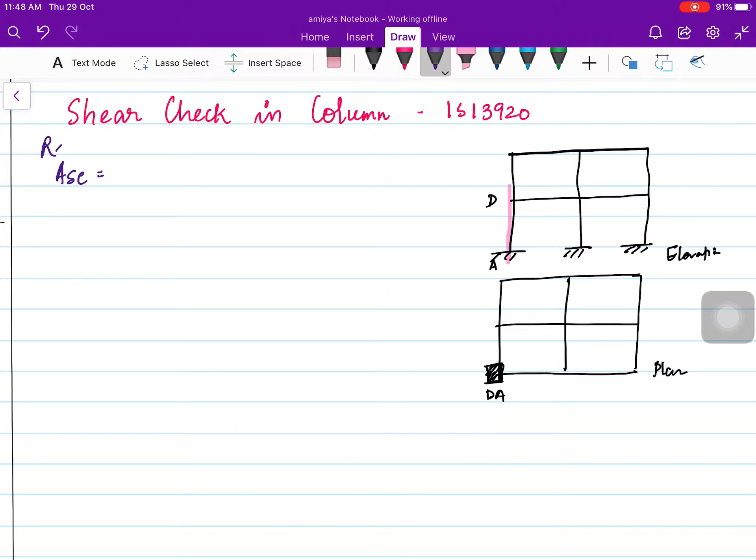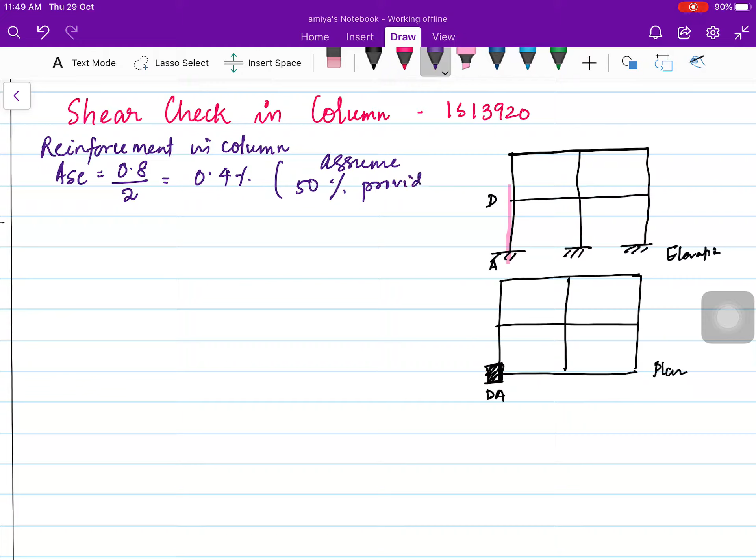In the last video, I have given the link. We have calculated the reinforcement required for the column. We have provided the minimum reinforcement and checked for biaxial bending, so 0.8% we have provided. I'm going to divide by 2, giving 0.4%. I've done this because I'm assuming 50% of the steel is provided for tension and 50% for compression. That's why I'm dividing by 2, and for this amount of reinforcement I'm going to calculate the shear capacity.

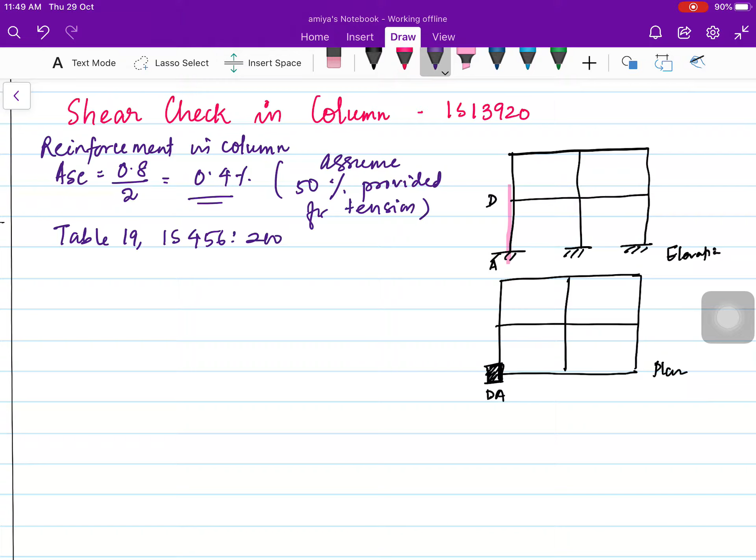If you refer Table 19 of IS 456/2000, you will get the value of tau c, that is the shear capacity. You might have also referred this many times for the beam. So referring this table for 0.4%, the value will be in the table.

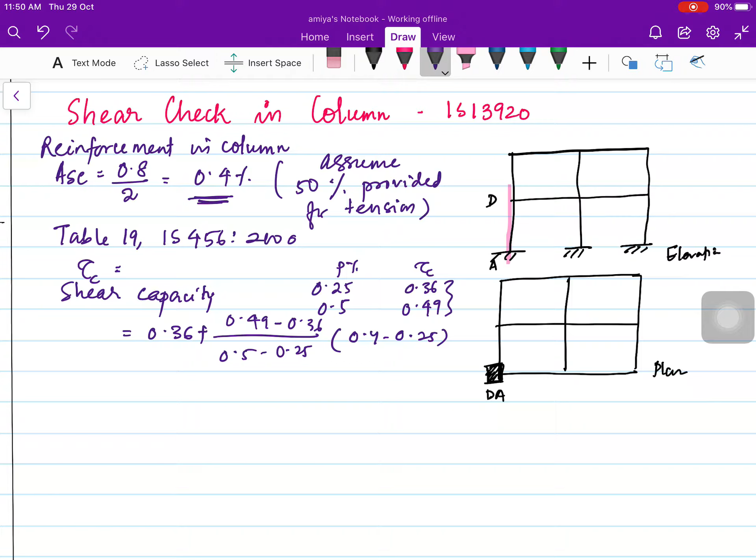If you see, there is a value for 0.25% reinforcement, which gives a tau c value of 0.36, and for 0.5% the value is 0.49. Interpolating between these two values: 0.36 plus (0.49 minus 0.36) divided by (0.5 minus 0.25), into (0.4 minus 0.25). We are calculating for 0.4%, so this value is 0.439 Newton per mm square.

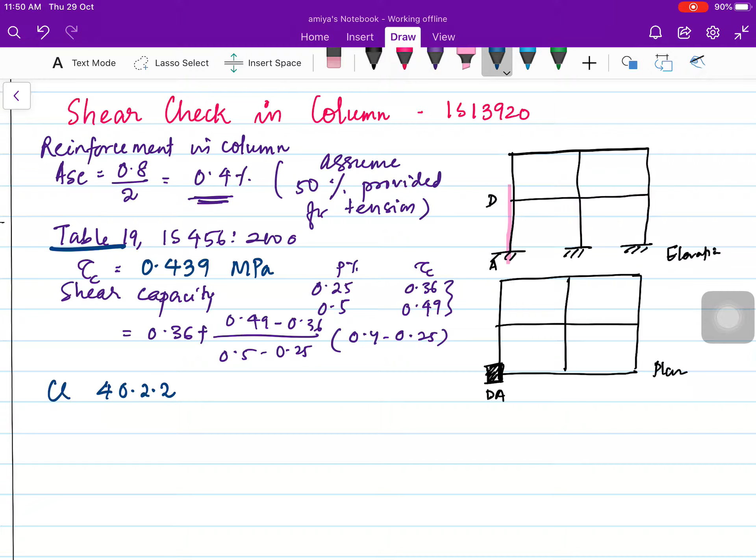Now, if you refer clause number 40.2.2, this table we usually use for beam. So in order to calculate the shear capacity for an axial member like a column, we have to multiply that with a factor delta, which is 1 plus 3 Pu by Ag by Fck.

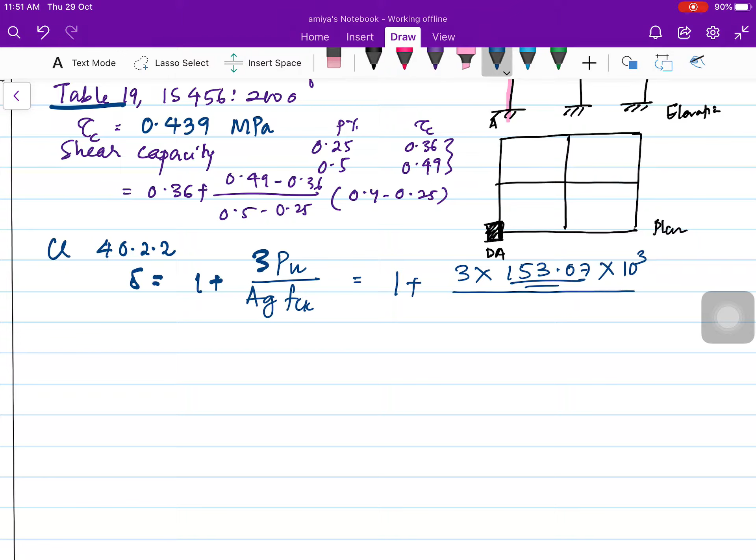So that will be 1 plus 3 into the axial force coming to the structure, which is 153.07 kilonewton into 10 to the 3. If you are referring the load calculation or the previous video where we calculated the axial force coming to this column DA in this multi-storey frame, you will know how this value came after the analysis - we have done gravity load analysis and lateral load analysis. From there we calculated this axial force coming to the column.

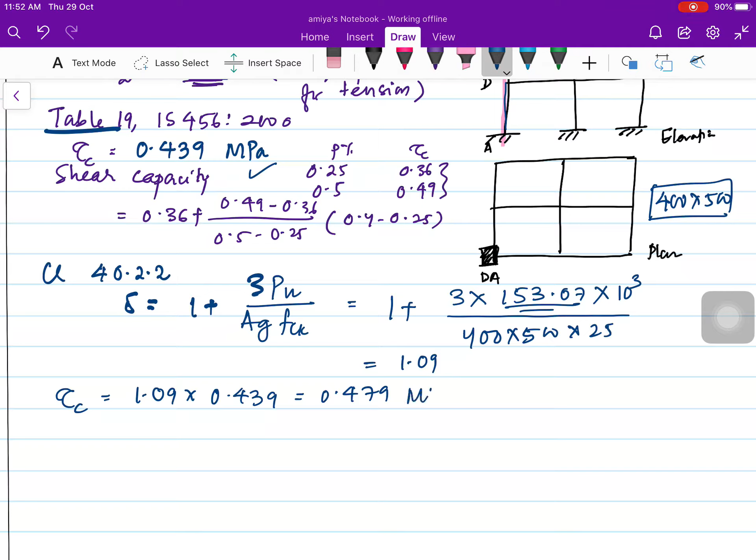So 3 into P by gross area. Column size we have taken 400 cross 500 - this is the size of the column we have assumed. So 400 into 500 into Fck is 25, giving a value of 1.09. So the shear capacity of the column is delta, that is 1.09, multiplied into the value we got from Table 19, 0.439. So the capacity is 0.479 Newton per mm square or megapascal.

Next. So this is shear stress capacity - this is stress, and we have to calculate the shear force capacity. So shear force will be...

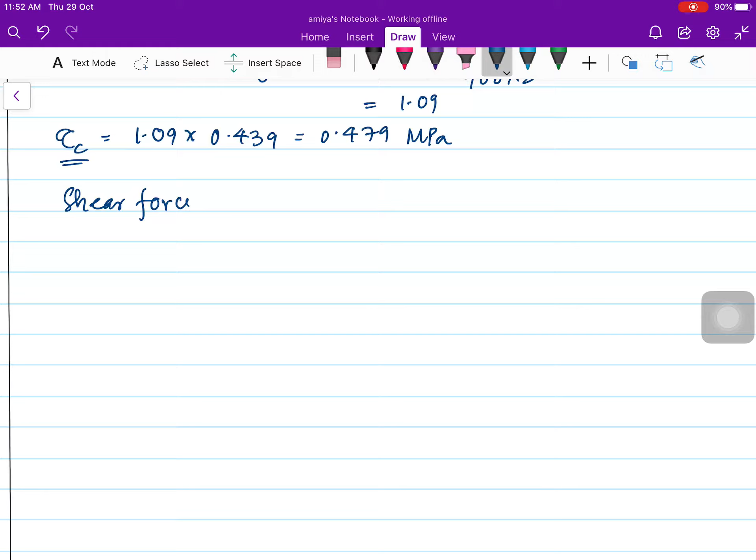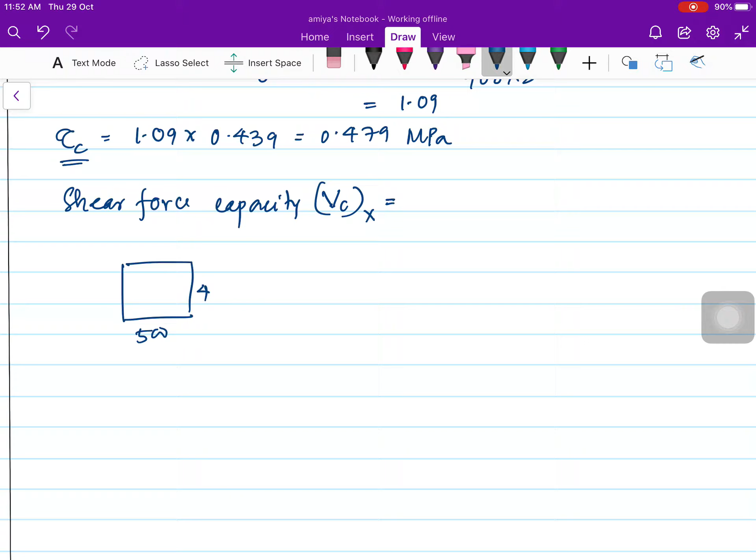That means shear stress. So if VC I'm writing in x direction and y direction, because we have two axes. If this is the column, this is 500 and this is 400 we have considered - this is the x-axis and this is our y-axis. Both axes will have different shear force capacity. So this is tau c into area we have to multiply, because this is shear stress into area. So we are going to multiply tau c into area.

Now for area, we have to calculate the effective depth. If this is the x direction, depth is 400 minus d dash. If you refer the previous video, we have already calculated d dash as clear cover 40 plus 8 for tie bar plus longitudinal bar by 2, that is 16 by 2, which is 56 mm. So 400 minus 56 is 344 mm. Similarly, the effective depth in y is 500 minus 56, which is 444 mm.

So for this, tau c is 0.479. I'll multiply with the width 500 into depth 344, so this comes to 82.4 kilonewton. If you divide by 1000, you'll get it in kilonewton. Similarly, 0.479 into 400 width and 444 depth, here the value is 85 kilonewton.

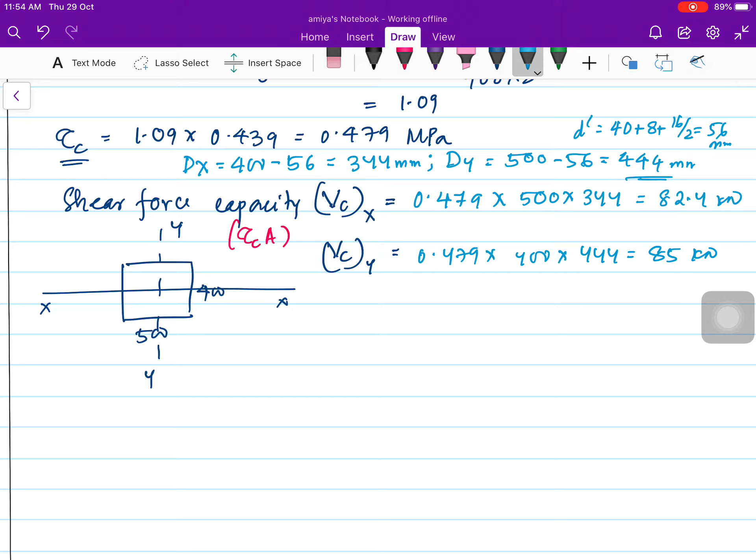So this is our shear force capacity, calculated from the shear stress capacity. This is the capacity, meaning this much force the column can take as per the reinforcement provided. Now we are going to find out what shear force is coming to the structure, and whether it exceeds the shear capacity or not. So now calculating the shear force.

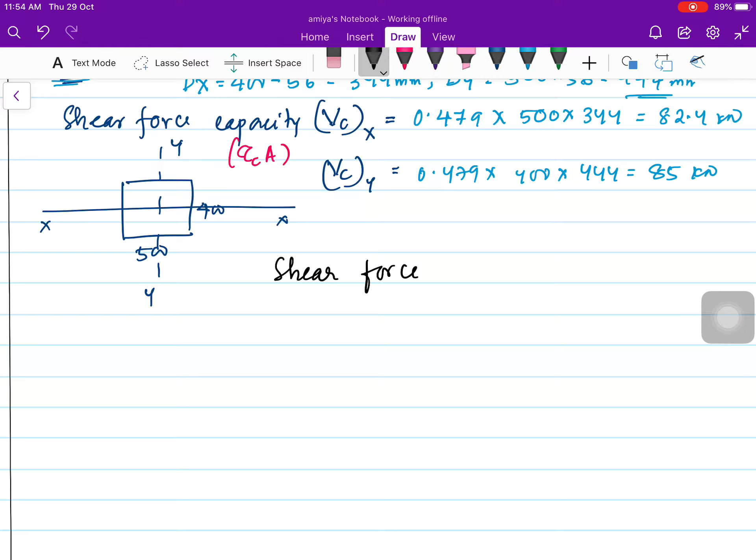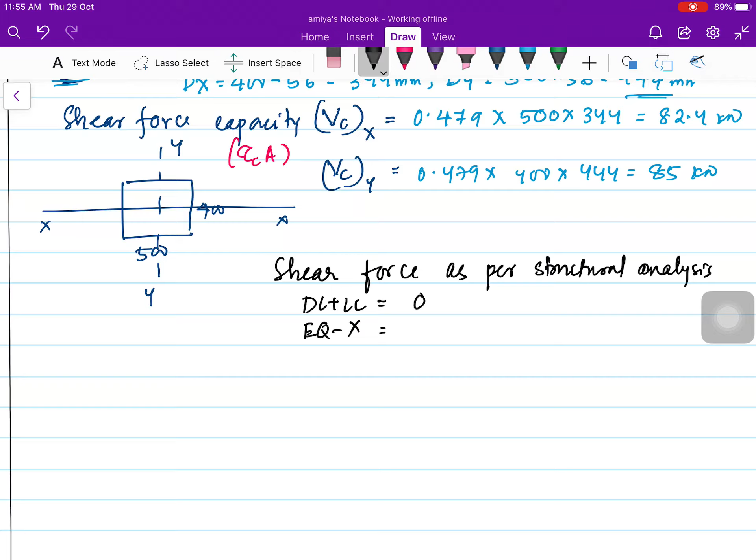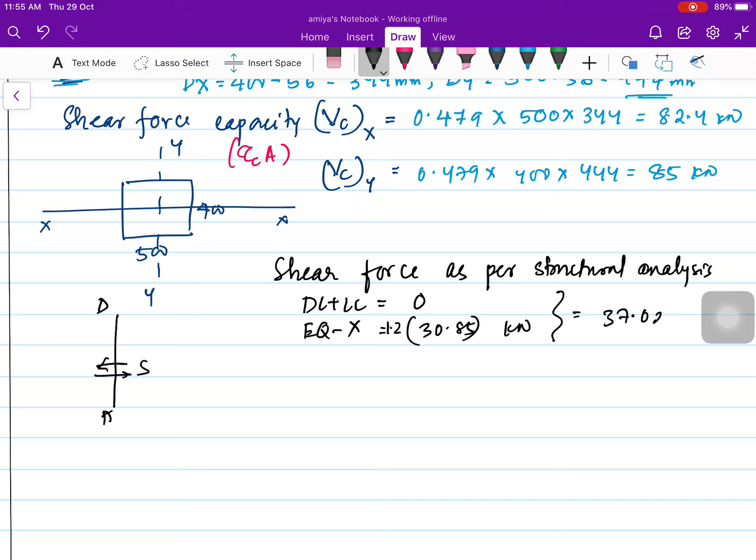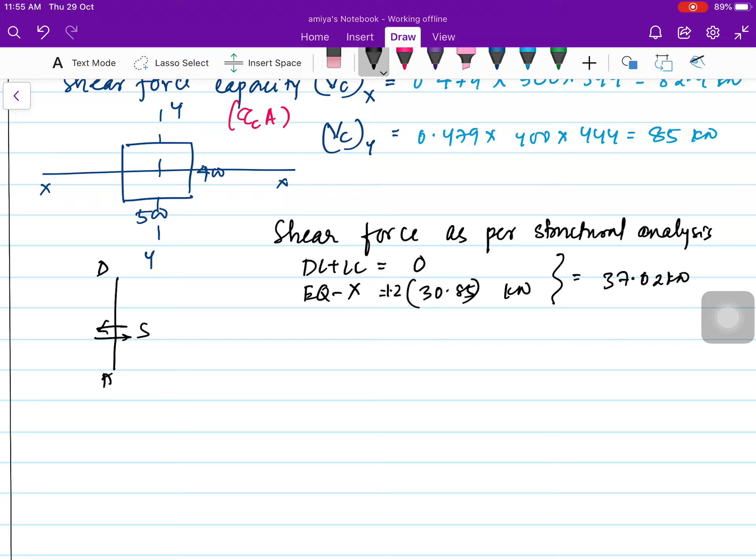So this I'm going to multiply by 1.2, because this is the factor we are taking for the analysis. Adding to this, we are getting 37.02 kilonewton, because it's 1.2 dead load plus live load plus earthquake X. For this load combination, we have analyzed our whole structure, so the same load combination I am considering.

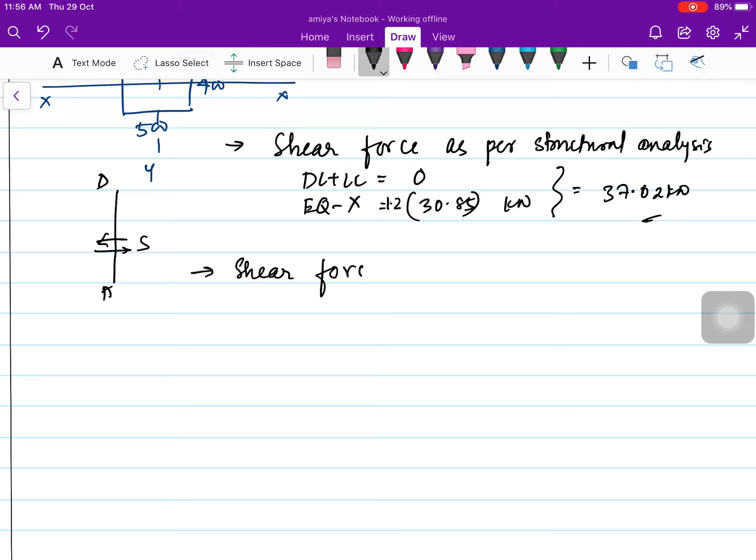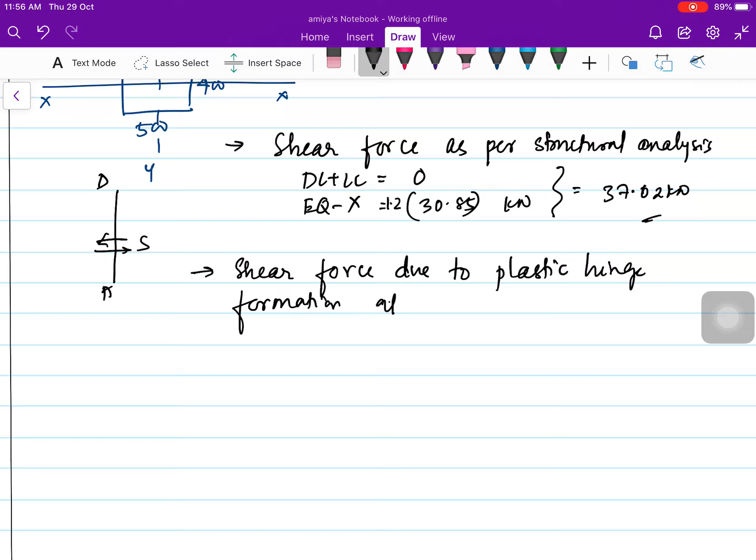But in reality, we have to consider all the load combinations. So this kilonewton value is as per the structural analysis. Then second, we have to consider also the shear force due to plastic hinge formation at beam ends. So for this, I'll just take this as Vs - what is the shear force coming to the structure?

So 1.4 into, for this we have to take the moment capacity of the beam, in sagging as well as hogging, 144.6. You can refer the video for maximum of MS and MH, that is moment due to sagging and moment due to hogging. So 144.6 by 3, where 3 is the length of the column. This comes to 67.48 kilonewton.

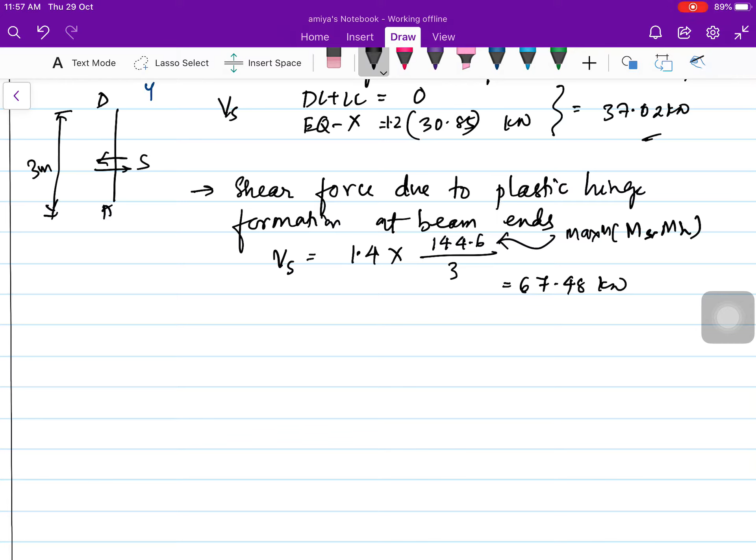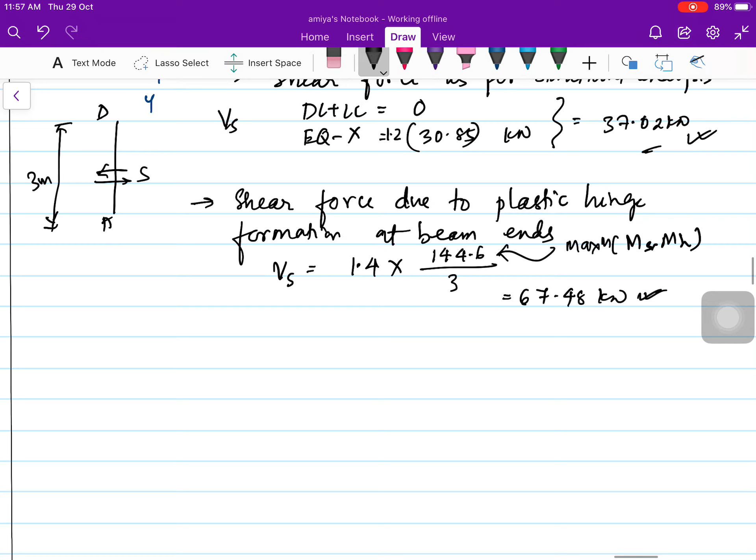So this is the shear force coming on the structure. And what is our shear capacity? It is 85 kilonewton. That means we don't need to provide more shear links, we have to just provide the minimum shear links, as it is less than shear capacity - the force coming on the structure is less than the capacity. So we have to provide minimum shear links.

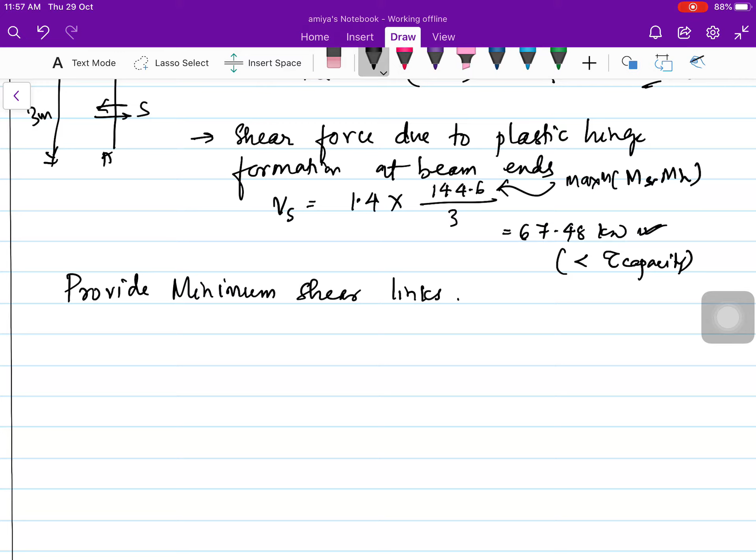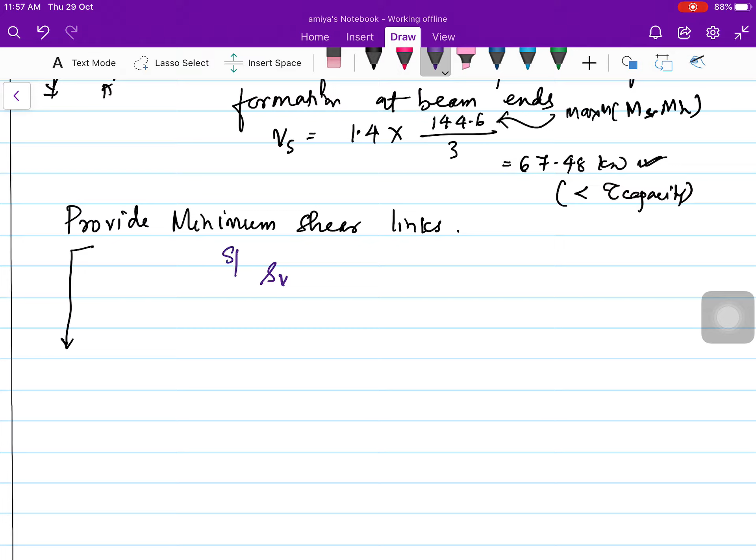Otherwise, let me just tell you, if it would have come more, then the shear spacing, the tie links that we should have provided - for example, if I'm using 2-legged 8 dia bar - into 0.87 Fy by the difference between the shear force capacity and shear force coming on the structure. So you have to calculate this and you will get the spacing.

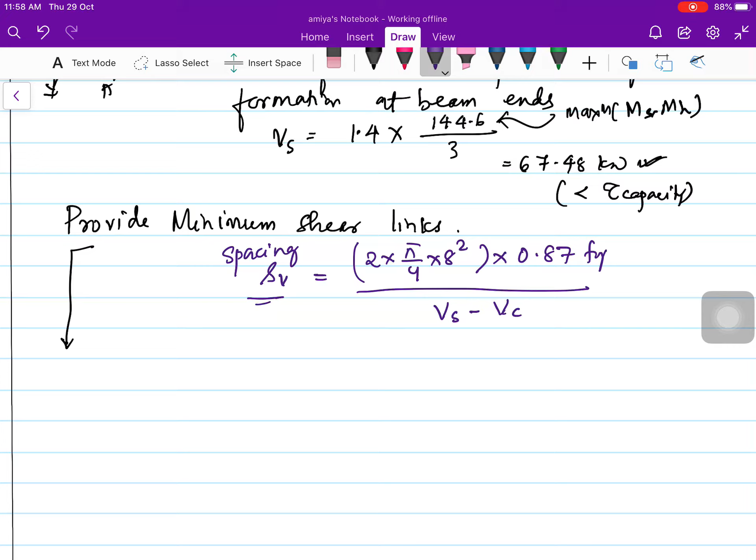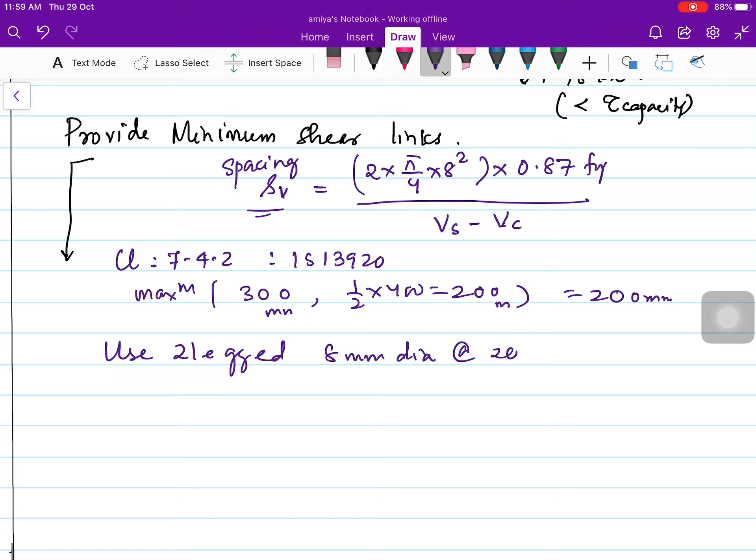But in our case, since we are providing the minimum shear links, if we refer clause 7.4.2 of IS 13920, the spacing should be maximum of 300 mm or half of the minimum lateral dimension, which is 200 mm. So I am going to provide 2-legged 8 mm dia at 200 mm center to center. Note, this provision is for nominal links, meaning we provide this in columns at mid height.

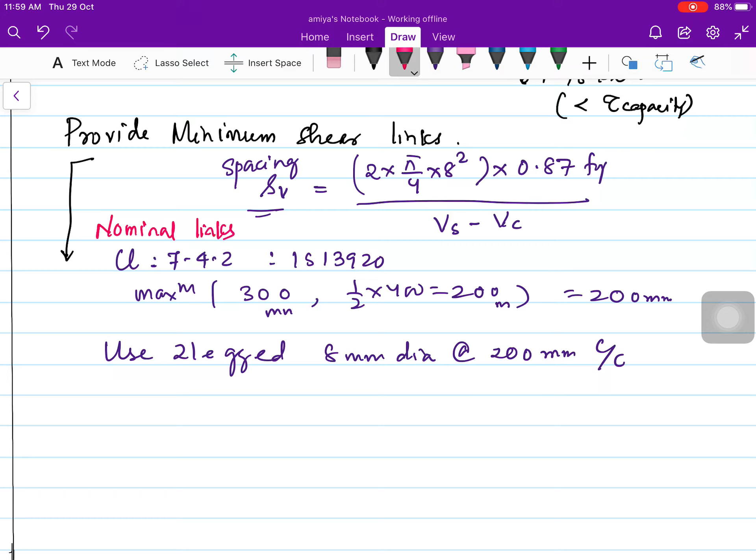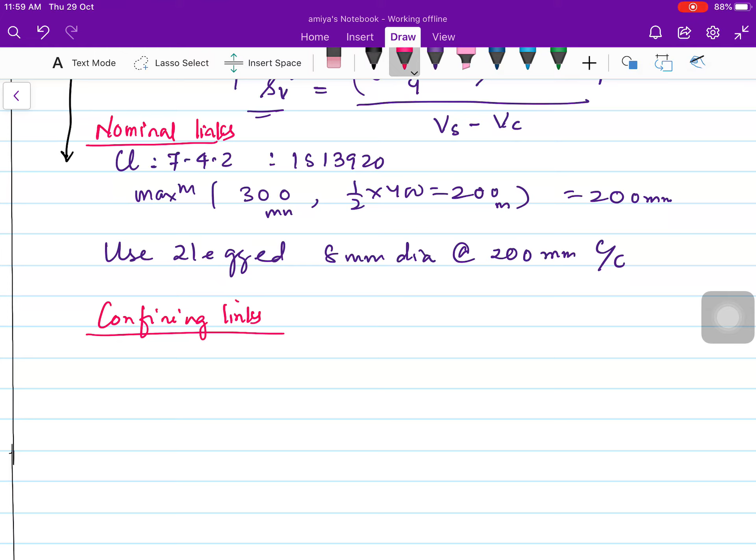Then next we have to calculate for confining links, meaning near the joints how much we need to provide. If you refer clause 8.1 of IS 13920, in the first bit A, the spacing is given. The tie bar spacing should not be greater than 1/4 of the least lateral dimension, which is 100 mm, and should not be greater than 6 into the dia of the longitudinal bar. We are using 16 dia bar.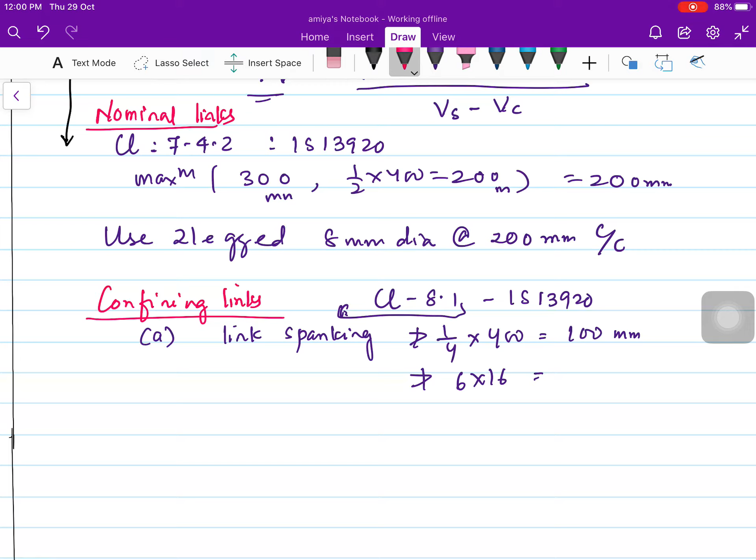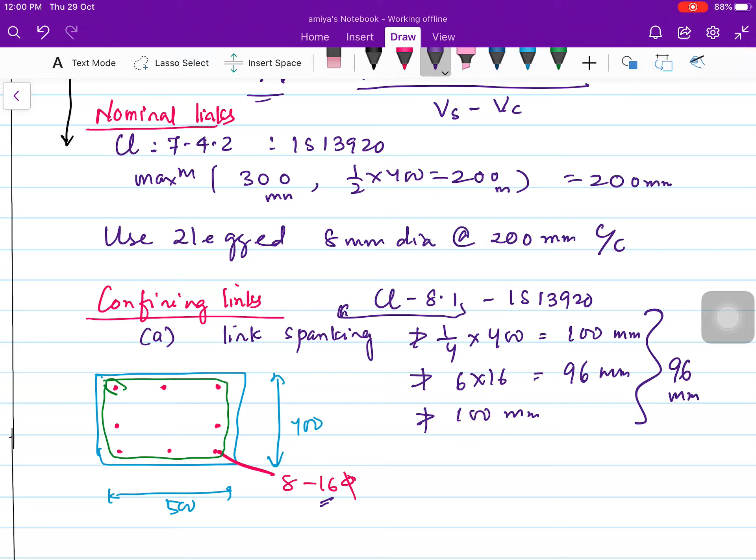So if this is our column, this is our 500 dimension, this is 400 dimension. In the previous video we calculated the longitudinal reinforcement required, which was 8 numbers of 16 dia bars. Now we are calculating the spacing: 6 into 16 dia gives 96 mm, and it should not be greater than 100 mm. So the spacing should be less than 96 mm.

And confining length: this is in bit B, confining length on either side of the joint, that means beam column joint, on either side of joint. It should be maximum, or if you see, it is written not less than larger dimension that is 500, 1/6th of the length of the column which is 500, or should not be less than 450 mm. So that means 500 mm, maximum of these values.

So if this is the column, here beams are there. This is our column. So we have provided 3 longitudinal bars. Now this confining links should be provided from joint to 500 mm length.

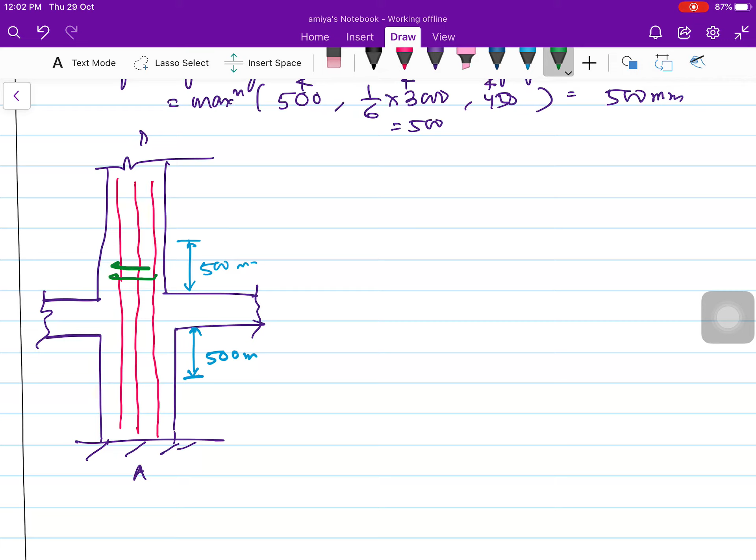That means here, these are the confining links. And then you have the normal nominal links - you have to provide the nominal links. So these are the nominal links. And the green colors I have shown, these are the nominal confining links.

For nominal links, we are providing 8 mm dia at the rate of 200 mm center to center. And for the confining links, we are going to calculate ASH.

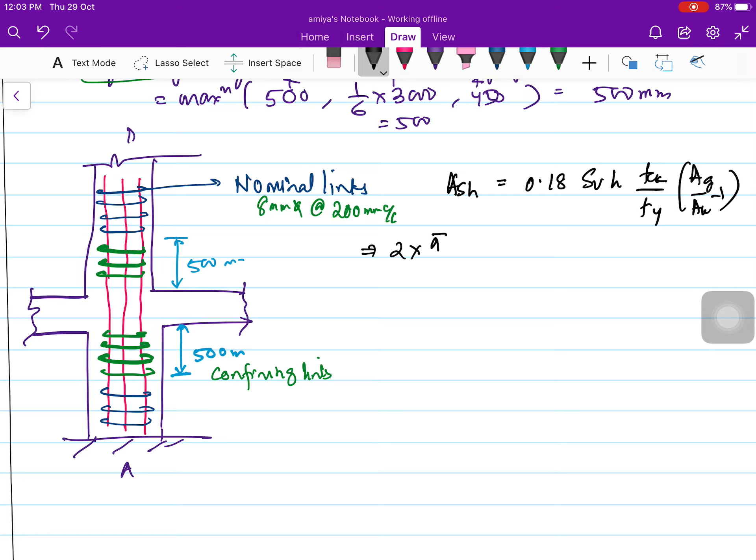So if you refer the clause, for the rectangular column, it has given the formula - it should be maximum of 0.18 SvH FCK Fy Ag by Ak minus 1, and there is another formula where you get lesser value of spacing, so I'm going to take this greater value. Using two-legged, pi by 4, 8 square, two-legged 8 dia link, 0.18 Sv into H.

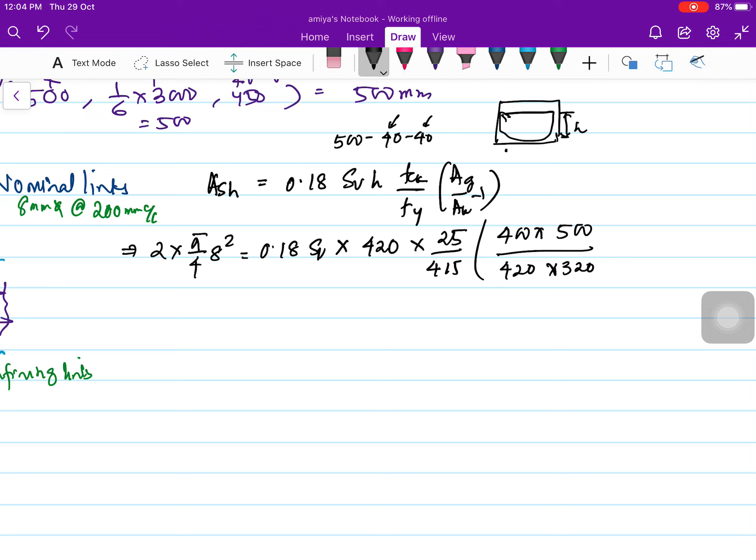So if this is your column, this is your stirrup, right? You have to calculate this length H. So 500 minus 40 minus 40 clear cover, because your stirrups are there all sides, you get 420, into FCK is 25, Fy is 415. Your gross area is 400 into 500 of column, AK will be 420 - you calculate 500 minus 40 minus 40. Same, you have to also calculate in the other direction, so it will be 320, 400 minus 40 minus 40 minus 1. If you solve, you get 45 mm.

So it is too less, so instead of 8 dia, I'll use 10 dia. Spacing will be 70 mm. If I increase the value, I'll get 100 for 12 dia legged bar. Anyhow, our minimum spacing we know is 96 mm, so 70 mm is less than 96 mm, so it is okay. So for confining links, use two-legged 10 dia bar at rate of 70 mm center to center.

This nominal link is based on your shear capacity, because our capacity is more, so I'm using the minimum tie bar area. Otherwise, you have to use this formula to calculate the spacing for nominal link, but we are providing the minimum. So for 8 dia bar, 200 mm center to center.

Then I have to calculate the confining length, which is 500 mm on either side of joint, and the reinforcement should be this spacing when assuming 10 dia bar. This confining link will continue from the joint to both sides, 500 mm, 500 mm.